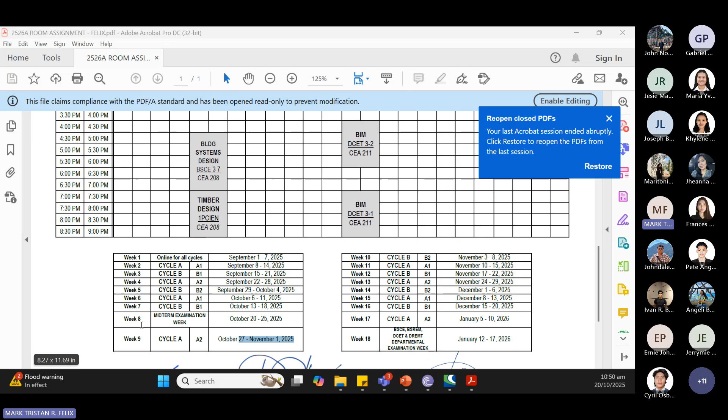Okay, moving back. So let's proceed with the topic. Okay, so our topic for today is timber columns. So last time our topic was beams and also the notching of the beam.

With regards to our learning module provided by the department, let me just open this pala muna. Ayan, check lang natin kung nasaan na tayo. So tapos na tayo dito. Ang wala na dito sa dalawang to, although dinagdag ko pa yung notching, although wala dito sa listahan. So yung composite beams, balikan na lang natin. I think floor joist was already covered by the beam design. Okay. Then let's go with the column design. So most likely matatapos na natin dito. Then more on additional problems na lang along the way.

Okay? Teka, magpo-pull out lang ako ng paint. Kahit snipping tool na lang pala. Okay, so for this one, ano ba pinagkaiba nung square tsaka nung bilog? Okay. So, ang difference niyan is that for the square, ito na ba yung snipping tool ko? Okay.

So this kind of column allows, or I would rephrase it, the translation or yung sideways movement niya is not equal to 0. So ibig sabihin kapag nag-move siya laterally, meron siyang displacement. On the other hand, yung rotation naman niya, it is equal to 0. In this case naman, aside from that na pag nag-move siya laterally, the displacement is not equal to 0, meron siyang value. Now, yung rotation naman niya is meron din siyang value, so it is not equal also to 0.

Okay, so just imagine kapag meron kang isang column or post na nag-move and then also nag-rotate. So para siya nagkakaroon ng torsion. Umiikot siya kasi meron siyang rotation. And at the same time, meron siyang translation, displacement horizontally. Now, ito naman, similar lang din dun sa isa. So meron siyang displacement, not equal to 0. On the other hand naman, 0 yung kanyang rotation. Now, ano ba example nito for this kind of support? So let's say meron tayong frame, di ba ganyan?

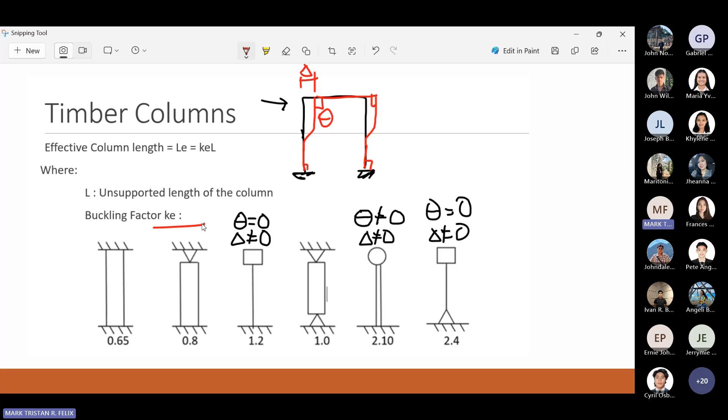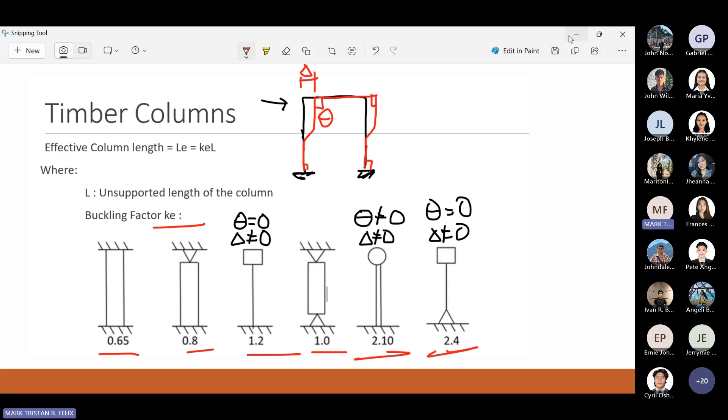So it is very identifiable with the problem. What kind of K na gagamitin? Just make sure you know each and every one of these values, whatever type of column was given doon sa isang problem natin. Okay? So, ayun. Anyway, going back again.

So for both ends fixed, it is 0.65. For one end fixed, one end hinged, it is 0.8. And for this kind of load, and then one end lang yung ating support na fixed, so it is 1.2. If both ends are hinged, it's 1.0. If it's one end fixed, and then there is value for rotation and also for the displacement, so it is 2.1. And then similar with figure number 3, pero naka-hinge siya, it is 2.4.

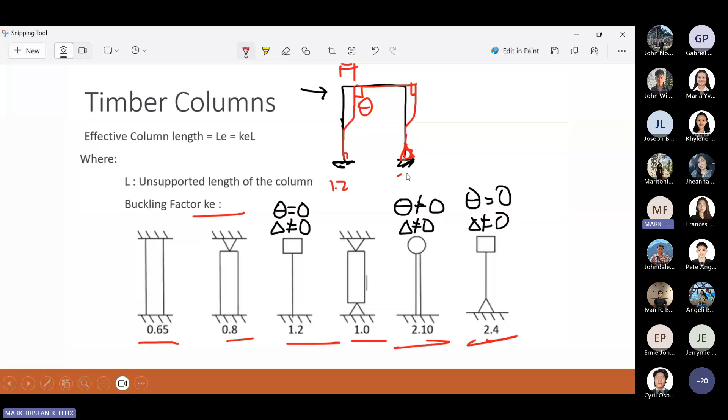Now, kapag naka-encounter naman kayo ng ganitong problem, kung saan ito is naka-hinge, so ang K nitong column na to, that's 1.2. On the other hand naman, yung isa naman is 2.4. Okay. So, let's go with the criteria.

So, for the allowable compressive strength, FC prime, in MPa, for rectangular simple solid columns, axial loads. For short column, the consideration is that the effective length over D should be less than or equal to 11. So, ang first step natin, kukunin natin yung effective length. Now, if you get that, you divide that with the least dimension of the column's cross-section.

Now, if it is less than or equal to 11, yung FC prime ng timber natin is equal to FC. So, meaning kung ano yung FC na nasa table, siya yung i-apply mo ng FC prime. Now, if the value of LE over D is greater than 11, pero less than or equal to K, where K is 0.671 square root of E over FC. E is the modulus of elasticity ng wood, given or nandun sa table. FC ng material, kung ano yung nandoon sa table, yun yung gagamitin natin.

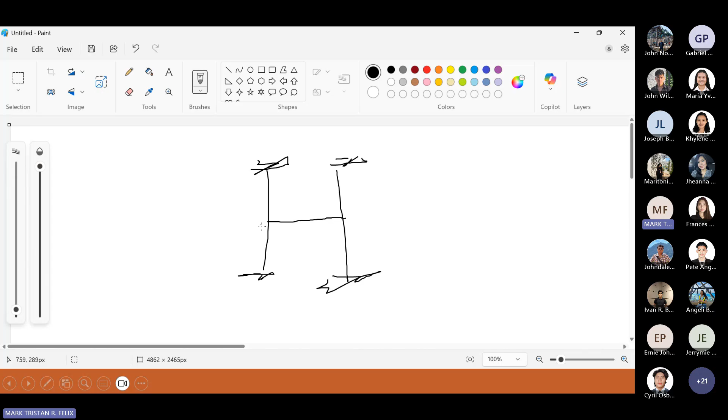If you don't want your column to be intermediate or long, pwede kayo maglagay ng mga lateral supports or braces. Di ba ginagawa din natin yan sa steel? Kapag sobrang haba, naglalagay tayo ng support dito sa gitna, tapos ganun din sa taas. We normally add that so that we can cut the unsupported length. Kaya tayo naglagay ng brace sa gitna para iiksi yung unsupported length na magagamit mo later sa LE over D, para lumiit yung value of LE over D.

Okay? Then, where is it? There. For the slenderness ratio of timber, which is equal to LE over D. Okay, so this is what we compute again to compare with 11 and K. Okay, this is its slenderness ratio. Okay, I hope it's clear.

So this is similar to steel with regards to the process, just with some content tweaks in the empirical formula. Again, first compute the column effective length, LE, and then get the slenderness ratio of the timber. Then compare it with 11 and K to determine if it is a short, intermediate, or long column.

I think I've already said what these are. Again, FC prime is the reduced compressive strength. FC is the allowable compressive strength from the table. E is the modulus of elasticity of wood, from the table. Effective length is KE times L. D is the least dimension of the column's cross-section. So if it is rectangular, look at the shorter side. If it is circular, D is just the diameter.

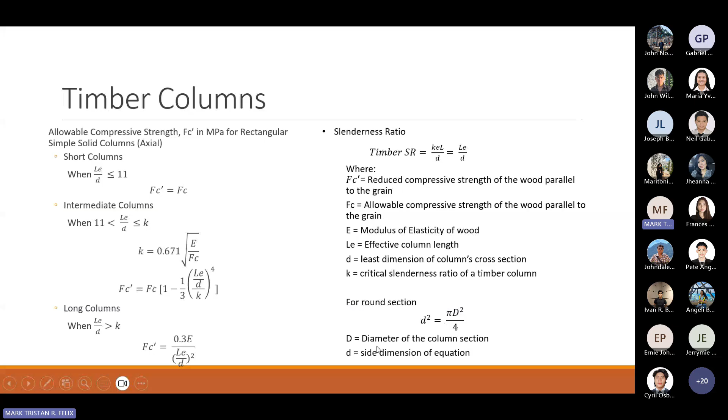Then the critical slenderness ratio of the timber, that is K. Sorry, class, correction on D when circular. Capital D is the diameter, so you need to convert it to a rectangular cross section. Get the area and equate it to the formula of a square, so you can get D, the least side dimension. That's how you get D, not the diameter. Correction.

Okay, a problem. A timber column of rectangular cross section, 150 by 200, has a length of 3.6 meters. It is fixed at both ends. FC is 9.56 MPa parallel to the grain, and E is 7310 MPa. Wait a moment.

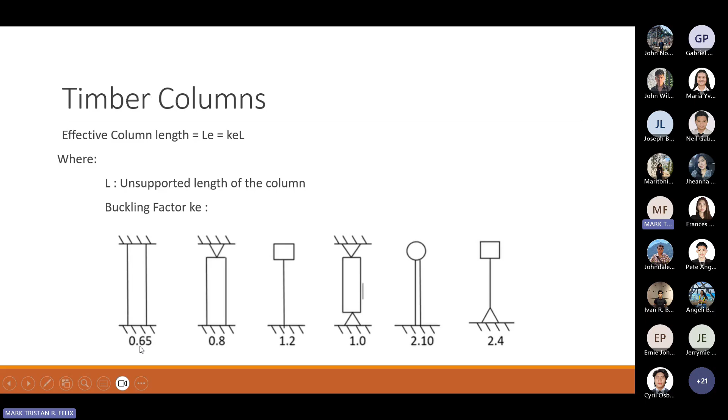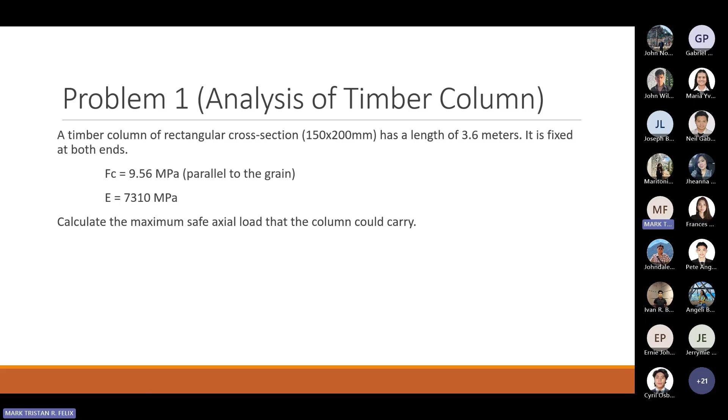FC parallel to the grain is 9.56, and the modulus of elasticity of wood is 7,310. Both ends fixed, so KE is 0.65 times L of 3,600, converting 3.6 meters to millimeters. We substitute into LE over D, over 150, the least side dimension: 0.65 times 3,600 over 150. The answer is 15.6. Comparing with 11, it is larger than 11.

So let's go with K. The formula for K is 0.671 square root of E over FC. E is 7,310, FC is 9.56, so K equals 18.55. Is the slenderness ratio greater than 11? Yes. Is it less than or equal to K? Yes. So 11 is less than LE over D of 15.6, which is less than K of 18.55. Therefore, it is an intermediate column.

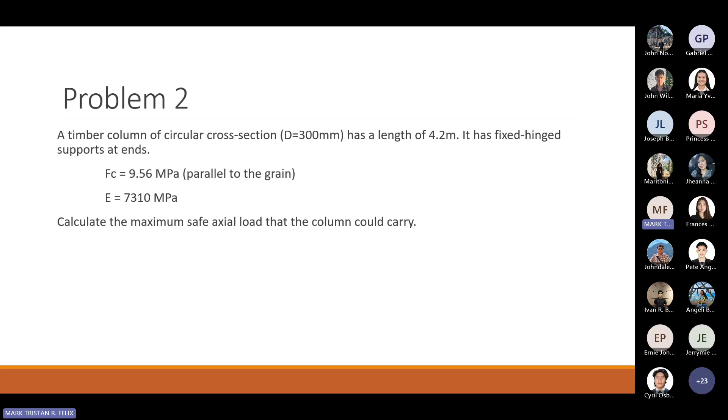Okay, so first step natin is we convert the cross section to its equivalent square. So ito yung circle, equivalent natin siya sa square, which is pi over 4 times 300 squared equals d squared, so d is 265.868. Wait lang ulit ah.

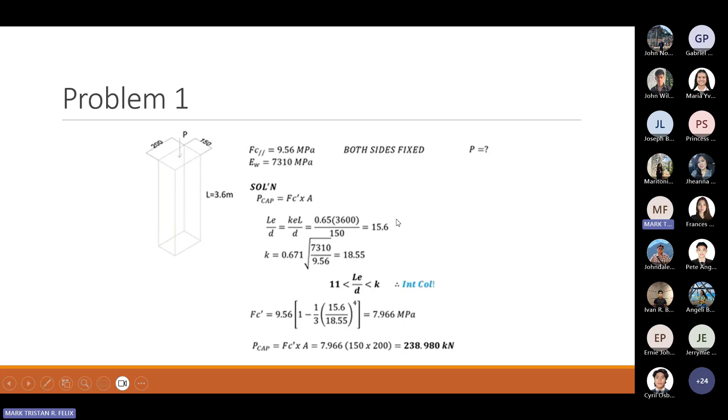Yung KE natin, that is 0.8. Going back dito, fixed tsaka hinge, so that is 0.8. Times 4,200, yung 4.2 gawin natin 4,200 para maging millimeter so that it would be unit consistent with D. Wait lang ulit class, sorry.

Going back. The slenderness ratio is 0.8 times 4,200 over 265.868. So the answer is 12.638. Compare that with 11, mas mataas siya sa 11. So now we compute the value of K, which is 0.671 square root of E over FC.

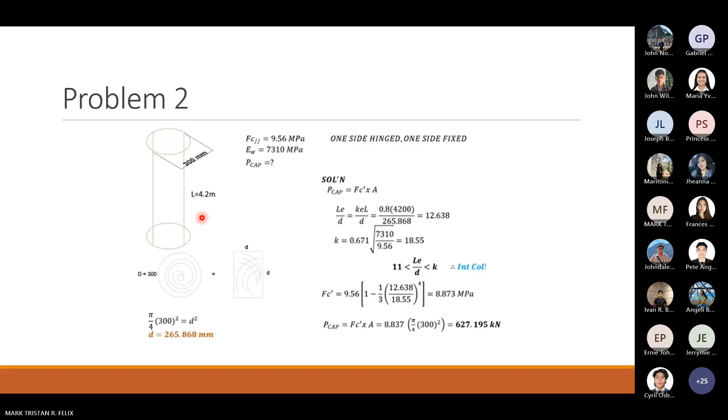So the answer for the maximum axial load is 627.195 kilonewton. Any question? Straightforward lang naman, madali lang to. Wala? Okay, so problem number 3.